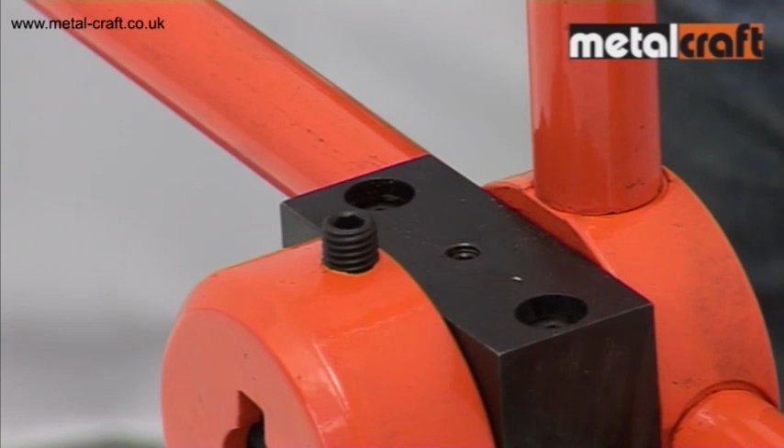Similar in operation to the smaller Practical and Master versions, the XL Twister is more powerful still, with a greater working capacity thanks to its rugged, extendable handles. Before you start twisting, always ensure the twister collar is well lubricated by using the lubrication hole in the top

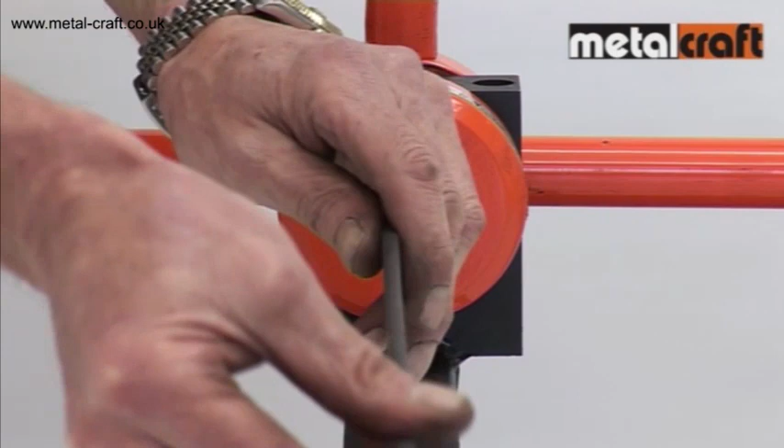of the boss housing. To twist flat bars, you feed one end of the bar into the round collar and use the gripping screws to hold the bar where you want the form twist to start. For larger flat bars, you can use just the 2 horizontal screws to grip it, but on smaller bars you may need to use the other 2 vertical screws to hold it centrally in the collar.

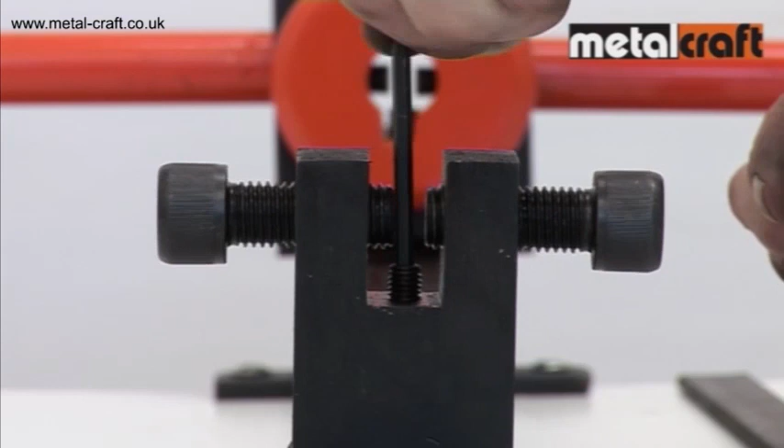At the other end of the bar, grip the bar at the point where you want the twist to end by using the 2 gripping screws. You will also notice the height setting screw, which is an especially handy feature when setting up the twister for repeated twisting of lots of bars.

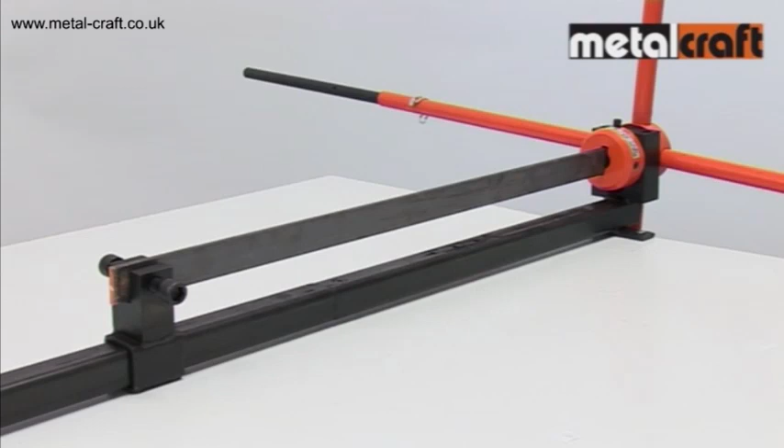With the bar you want to twist firmly gripped at each end, you can start twisting the bar by rotating the handles in the collar. To reduce the effort required for larger bars, you can use the extra leverage provided by the extendable handles.

Each rotation makes a twist tighter and tighter, but a note of caution here is to avoid over-twisting, as any bar will eventually buckle if too many twists are attempted. When finished, unclamp the bar at each end, and then admire the quality and consistency of your twist.

When twisting square bars, use all 4 gripping screws in the collar to ensure the bar is properly centered. Also use the height setting screw in the slide to keep the square bar level. Twisting is then performed in exactly the same way as with flat bar. When complete, you have a consistent twist produced very quickly, essential when producing lots of identical twisted bars.

The XL Twister can be supplied with an optional kit that will allow you to produce high quality and bulbous baskets that can be incorporated into your finished metalwork as a decorative feature. To make these baskets, you first need to tack weld 4 square or round bars of a set length together to form a cluster.

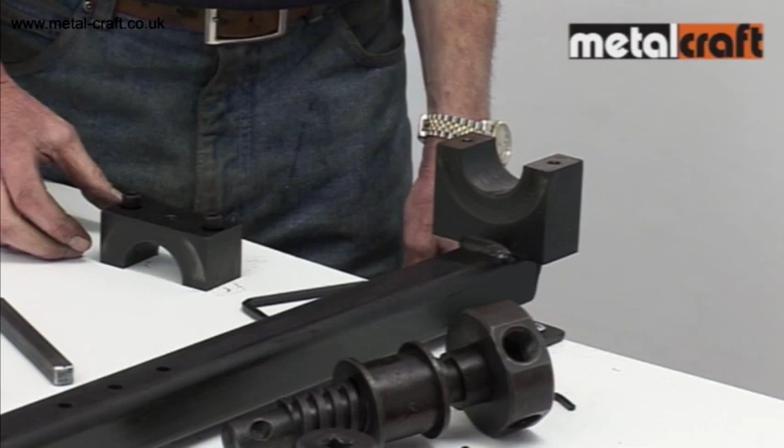The kit contains a special drive thread and surrounding nut, which fits into the boss housing in place of the normal collar. This is clamped down as per our detailed instructions provided with the kit. The handles are then transferred from the collar to the capstan at the end of the drive thread. The kit also includes 2 sets of gripping components, one large and one small.

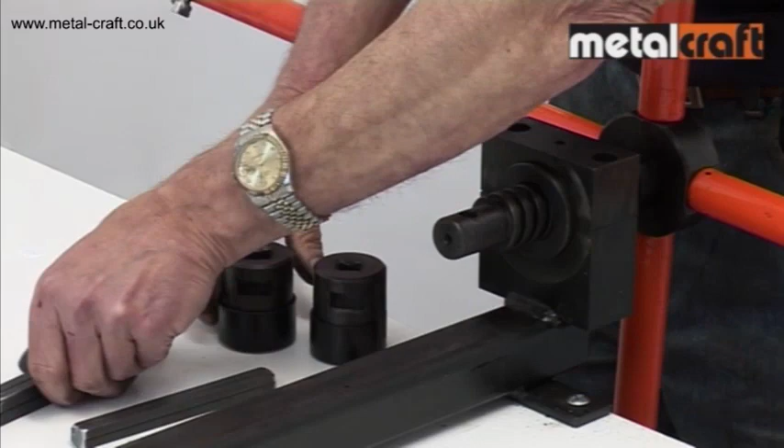Each set has a separate gripping collar, which itself is held on the end of the drive thread by a special pin, which in turn is kept in position by a plastic split ring. The matching collar at the other end is part of the double-ended carriage, which is fixed into the twister slide.

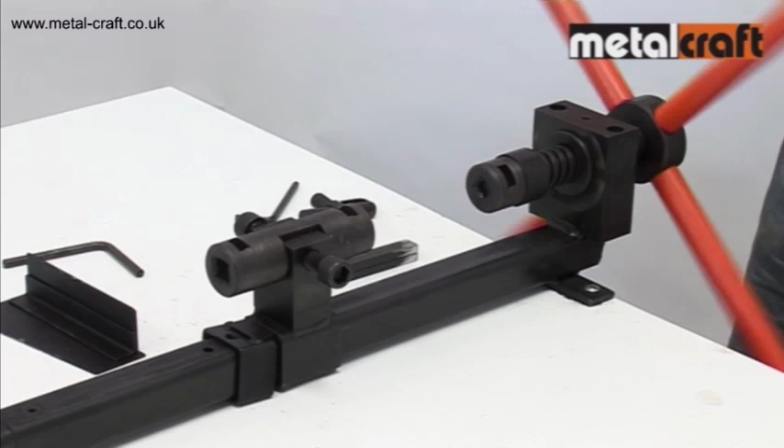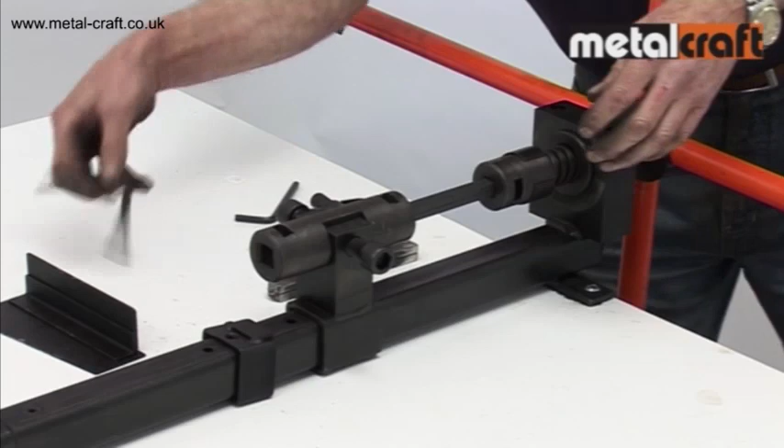You simply select the size you require and set these up in the twister as shown here, and you then line the end stop up with the correct hole in the body for the size of basket being made. Finally, drop the key into place to lock it there. Now you rotate the handles between 1 and 1/4 turns in the direction shown.

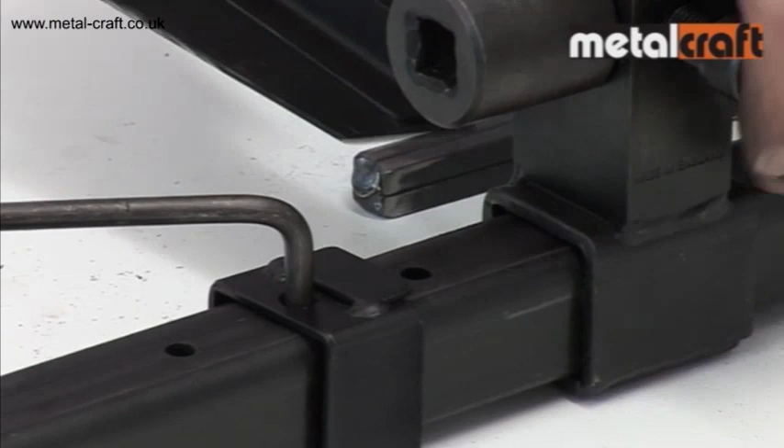Next, slide the specially designed wedge plate between the slide and the retaining lip of the end stop. Now you rotate the handles back the other way until all 4 bars in the cluster are fully opened out.

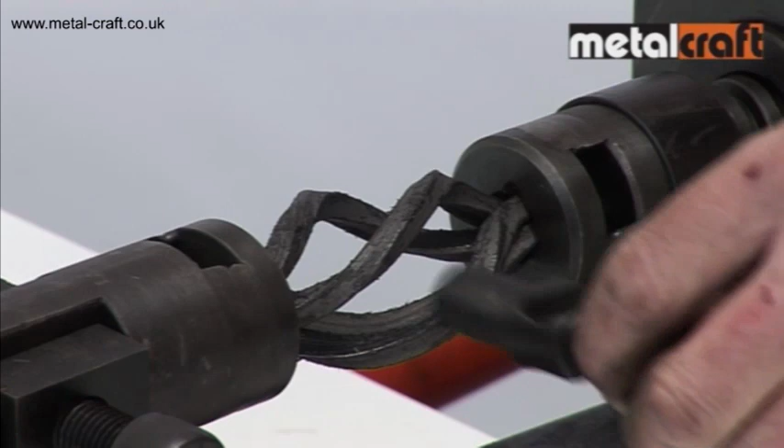Then, to ensure an even spaced basket, you drop the 2 halves of this clever spacer device into the middle of the basket and join it together and hook it onto one of the strands. Now you continue rotating it in the direction shown to form an even basket. When this is done, you can remove the spacer and the wedge to release the basket.

At this point, you can choose to make the basket even more bulbous. This is done by removing the plastic split ring, taking the drive pin out, and then rotating the handles to apply more squeeze to the basket.

After removing the wedge, you can release a fantastic looking basket for your ornamental metalwork. This great add-on kit allows your XL Twister to produce an impressive range of decorative features for your projects.